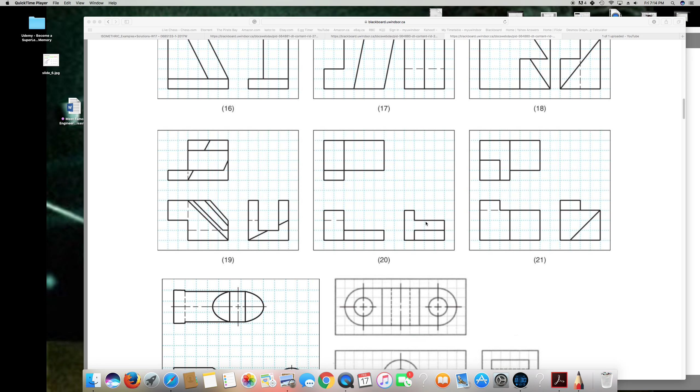Guys, in this video I'm going to show you how to construct an isometric view from orthographic views. So if you see, we have lots of pictures right here. I have done all of these pictures in my previous videos. If you want to know how to construct 16, 17, 18, 19, 20, you can go to my previous video and check it out. But I'm gonna draw the last one in this video. Let's see how to draw this. Okay, here we go.

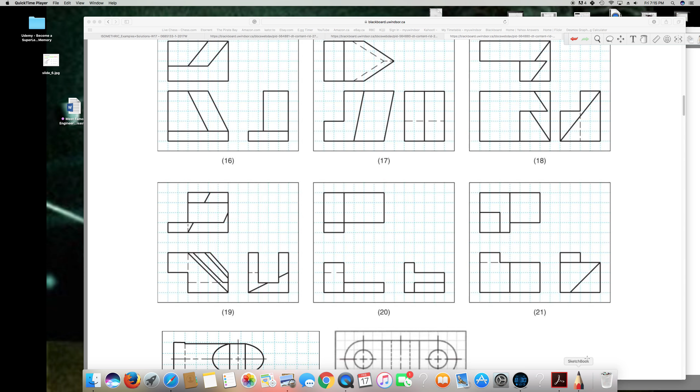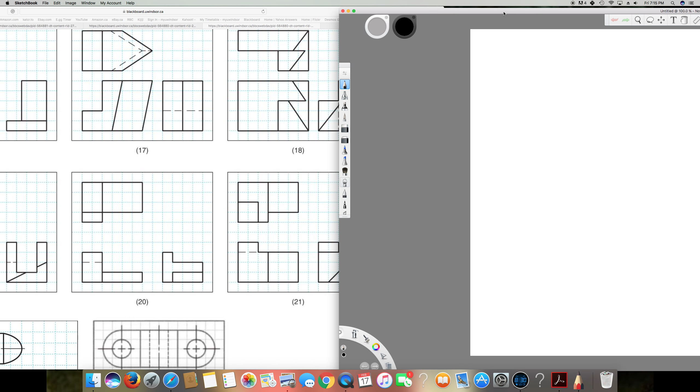So first of all, we have three views here: front view, right side view, and top view. Right. So my first step is drawing the distance of the bottom and the height, and the distance from the right side view. So let's see the bottom part. If you see, it's 6 boxes long, and when we construct in isometric views, it has to be 30° higher than the ground. So make sure it's 30° higher, and 6 boxes long like this. And from the right side view, it's 4 boxes long, so that's also 30° higher.

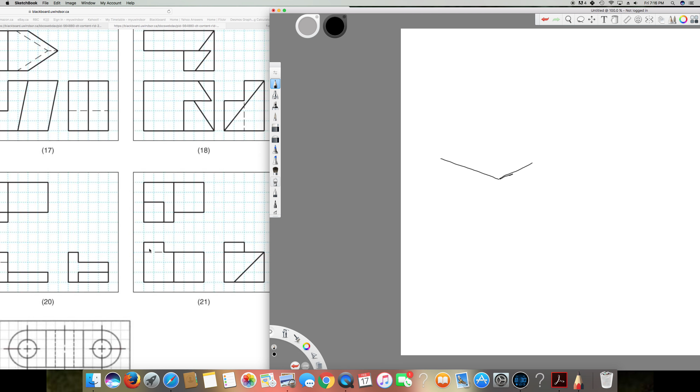And the height is gonna be a perpendicular straight line. 1 2 3 4, it's gonna be a straight line. Now after I draw this one, I have to construct a box, because after I construct a box, the object is going to be within the box. It doesn't go outside, because this is the dimension, and it should be within this dimension. So 100% nothing goes outside of the box.

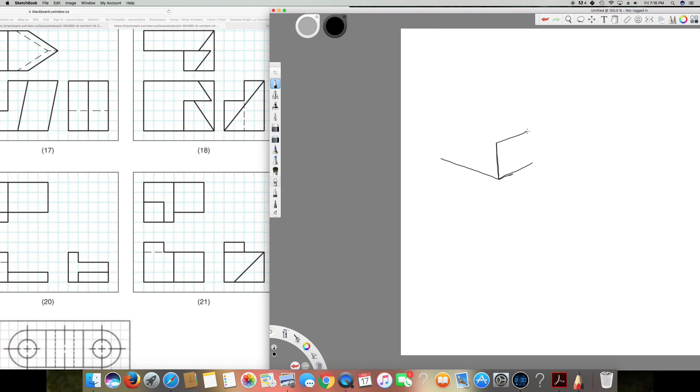So let's see. Now, in order to construct the box, I have to draw every line parallel to each other. So this one is going to be parallel to this one, and all of the heights are going to be parallel to each other. So it's going to be like this and like this, connect with the parallel side, and like this and like this. So this is my box.

Now what I'm going to do is, the first step, I'm going to get rid of all of the parts that don't appear at all. So if you see from the front side, the top part, there's nothing. And first of all, before we do this, if we draw the incline part first, it will make our life much easier, because if we don't draw the incline part, then we draw the picture and finally find out there's an incline, that's gonna mess everything up. So first I'm gonna draw the incline line like this, because this is appearing only from the right side, right? So I'm drawing that one first. So let's see what happens after this.

And also if you see, from the top view, there's nothing until this part. So to make sure how far this incline line goes: if you see from the front view, there's a division from the third box, right? So it means the dimension is changing only from the third box. So in the right side view, you are seeing an incline line, and in the front view, the dimension is changing at three. Oh, now I got the idea. The incline line goes until the three boxes. So let's draw this incline surface until three boxes.

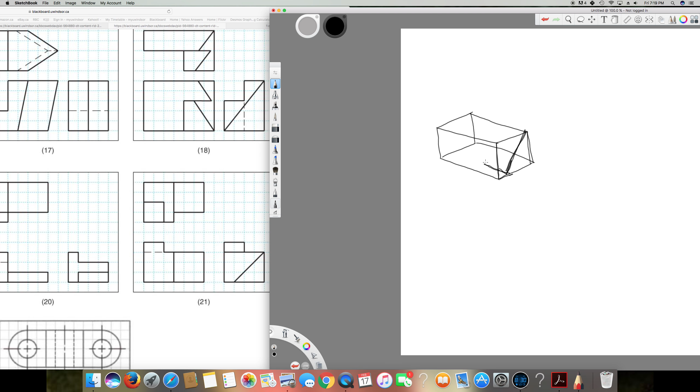Okay, now what I'm gonna do is extend this one to the top, right? And make sure, guys, according to the front view, there's no fourth box, because if you see, the incline line is starting from the third box. So we have to draw the incline line from the third box.

Third box is going to be like this and like this, all the way right here. And we have to get rid of the unnecessary lines, because that's going to confuse you a lot if you keep it. So get rid of that. So we have drawn the inclined part. Now let's see what we can do next.

So we have got rid of the part that doesn't appear from the top view, right? But front view also, I got rid of the part that doesn't appear from the front view, but I got rid of that until the third box, but in one more box it doesn't appear. So I construct one more box, and I had to make sure how this goes.

So if you see from the top view, it goes all the way to the end, and from the front view it appears at this height, same height, there's no incline line. So let's draw it straight until the end, and it appears in the top view, so it's going all the way to the end. And it's gonna be like this, something like this.